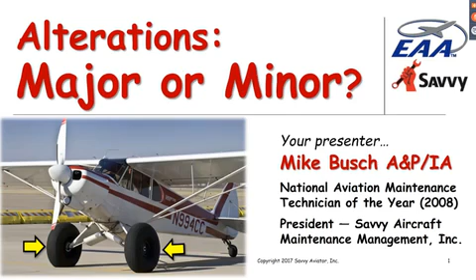As Tim said, tonight's presentation is entitled Alterations, Major or Minor. We're going to be talking about the rules for making alterations to certificated aircraft. And just to illustrate some of the issues we're going to be talking about, I'll tell you a couple of stories where things like this came up.

A Bonanza owner asked his avionics shop to install a second cigarette lighter socket on the panel of his Bonanza to accommodate his iPad charger and portable GPS. The avionics shop explained to the Bonanza owner that this would require an FAA field approval from the FSDO and that getting one would probably be costly and time consuming. We'll talk a little bit about field approvals and exactly how one goes about getting one.

In any case, the avionics shop discouraged the Bonanza owner from doing this. Later on, the owner made the exact same request of his regular A&P mechanic, and the mechanic said no problem, installed the second socket in the Bonanza, and signed it off with a simple logbook entry. So the question is, who was right? The avionics shop that said you can't do this without a field approval, or the A&P mechanic who installed it and signed it off with a simple logbook entry?

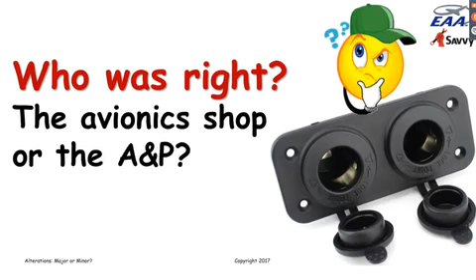Along a similar vein, a Cessna 210 owner had his mechanic install a landing gear mirror on the underside of the left wing so he could look out and verify that the landing gear was down and locked. That was all fine, and the mechanic went ahead and did that. Then several years later, at an annual inspection, the IA who was inspecting the aircraft said he could not find a Form 337 for this mirror and insisted that he couldn't sign off the annual as airworthy unless the owner consented to remove the mirror or else go obtain an FAA field approval to approve its installation.

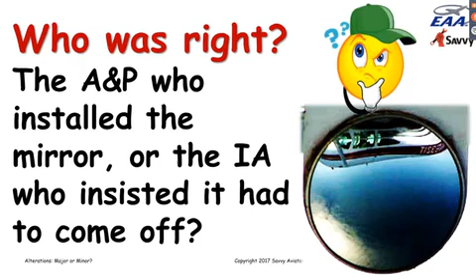So again, the question is, who was right? Was the A&P who installed the mirror to begin with correct in doing that, or was the IA who insisted that it had to come off correct? This whole area of alterations, which ones are legal, which ones require FAA permission, and so on, is quite confusing. And it's not only confusing to owners, but it's quite confusing to mechanics, as these two stories indicate, where you have different maintenance professionals rendering diametrically opposite opinions as to whether an alteration is permissible, whether it requires a field approval, and so on. So that's what we want to talk about tonight: what the rules are about alterations and what the procedures are.

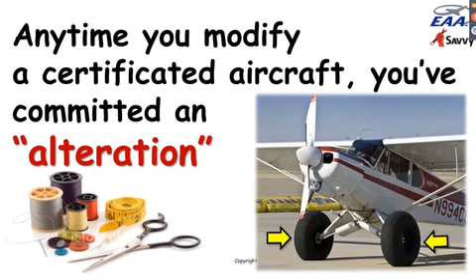Anytime you modify a certificated aircraft, you've committed what's known as an alteration. The FAA recognizes two different kinds of alterations: major alterations and minor alterations. As you probably can figure out from the terminology, the FAA is very interested in major alterations, and they have a whole bunch of requirements before a major alteration is permitted. Minor alterations are the ones the FAA doesn't really want to know about. They consider them sufficiently inconsequential that they don't want to even be bothered with it.

So the question is, how do you decide whether an alteration is major or minor? Who decides? And what is the guidance for making that decision? Well, the first place you would normally go is FAR 1.1, which is the part of the FARs where terms are defined. And sure enough, in FAR 1.1, there's a definition of the term major alteration. It says that a major alteration is one that might appreciably affect weight limits, CG limits, structural strength, performance, power plant operation, flight characteristics, or other qualities affecting airworthiness.

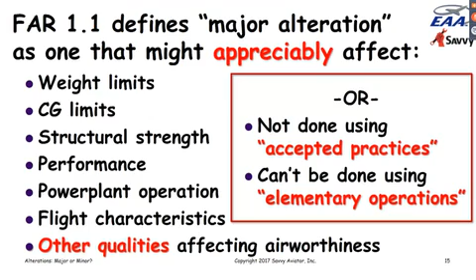It also says that any alteration that is not done using accepted practices is a major alteration, and any alteration that can't be done using elementary operations is a major alteration. Now, that definition leaves an awful lot to the imagination. First of all, what does appreciably mean? What other qualities affecting airworthiness are they talking about? What are accepted practices and what are elementary operations? None of those things are defined in the regs. So as I said, this definition leaves a lot to the imagination.

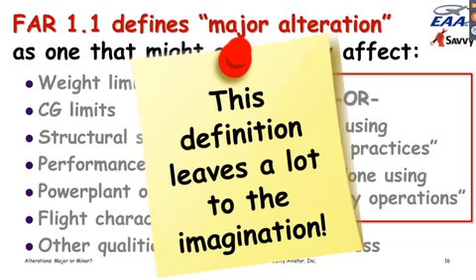And so in order to provide some additional guidance in making a decision as to whether an alteration is major or minor, the FAA, in addition to this basic FAR 1.1 definition, provides further guidance. The primary source of that guidance is Appendix A of Part 43. And in Appendix A of Part 43, the FAA lists a whole bunch of things that they consider to be major alterations.

So a mechanic can go look at that list in Part 43, Appendix A, and see whether the alteration that is being proposed is in that list or is similar to something in that list, in which case it's reasonable for him to assume that it's a major alteration. On the other hand, if the alteration is not in the list of things spelled out in Part 43, and if it doesn't clearly seem to trigger any of the major criteria in the FAR 1.1 definition, then it's reasonable for the mechanic to conclude that the alteration is a minor alteration.

In addition to Part 43, Appendix A, there are a number of advisory circulars that give information about certain things. The FAA has an advisory circular, for example, that says that the installation of shoulder harnesses is a minor alteration, that the installation of angle of attack indicators is a minor alteration. These are things that the FAA wants to encourage people to do. And so one of the ways that they encourage people to install these things is to say, we're not going to put you through any rigmarole. You can just go ahead and install them.

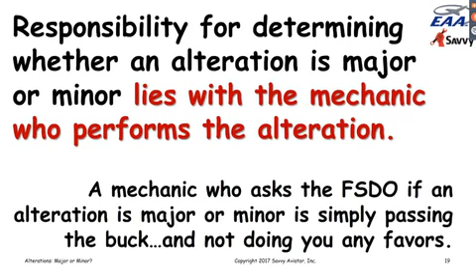And a mechanic who just goes to the FSDO automatically is not doing his job and is probably not doing you any favors. Now, if a mechanic determines that the alteration is a minor one, that he may perform it using acceptable data. I'll talk about what acceptable data means in a minute. And he may sign it off with a simple logbook entry.

A minor alteration does not require going to the FAA. It does not require filling out a Form 337. The FAA never gets informed that the minor alteration has been done. And it doesn't want to be informed. The fact that the alteration is minor means that it's one the FAA is just not interested in knowing about.

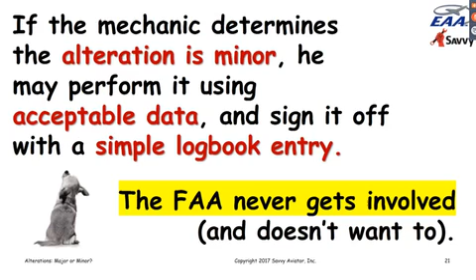What's acceptable data? Well, acceptable data, first of all, when they talk about data in this context, it means drawings, specifications, methods, techniques, and practices. And for them to be acceptable, they simply have to meet all the requirements of all applicable FARs. The acceptable data does not need to be reviewed or accepted by the FAA prior to use.

The mechanic who uses acceptable data should theoretically be prepared to demonstrate to the FAA why he believes it meets all applicable requirements if he was challenged. But normally he never is challenged. Normally it's never questioned.

And the FAA would have the burden of proof that what the mechanic did not meet regulations. In other words, things are presumed to be acceptable unless the FAA can show a specific regulatory violation why it's not acceptable. So simply saying that a minor alteration is done in accordance with acceptable data is very broad. It means that if the mechanic uses any reasonable method of performing the alteration, it's okay.

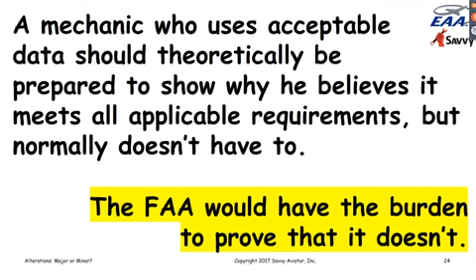So again, for minor alterations, the FAA doesn't get involved, the FAA doesn't get informed, and the FAA basically trusts mechanics to do the right thing.

Now, on the other hand, if the mechanic determines that the alteration is a major alteration, then it gets a lot more complicated. The mechanic is then required to perform it using approved data, not just acceptable data, but approved data. He must have an IA inspect it. So if the installing mechanic is not an IA himself, he's going to have to call in an IA to inspect the alteration once it's made.

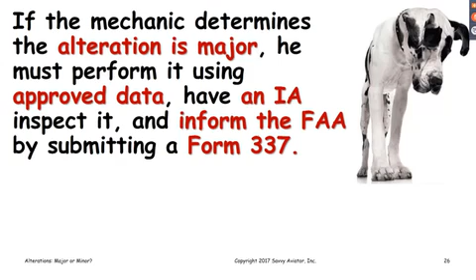And then the FAA has to be informed of the major alteration by filling out and submitting an FAA Form 337, which gets sent to Oklahoma City and becomes a permanent part of the aircraft's records down there.

Now, approved data means drawing specifications, methods, techniques, and practices approved by some authorized representative of the FAA. So unlike acceptable data, which the FAA doesn't ever have to have even seen, approved data must have been reviewed and signed off with the signature of an FAA employee typically, or in some cases, an FAA designee, like a designated engineering representative. But it has to have been actively approved by the FAA, not just acceptable. It's a much more stringent standard.

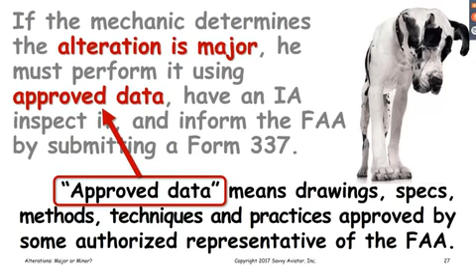Where do you get approved data? The most common source of approved data is a supplemental type certificate, an STC. Another possible source is an airworthiness directive.

If an airworthiness directive requires that some alteration be made to an aircraft, then that airworthiness directive itself constitutes the approved data for making that alteration. An AD is basically an alteration that is being compelled by the FAA.

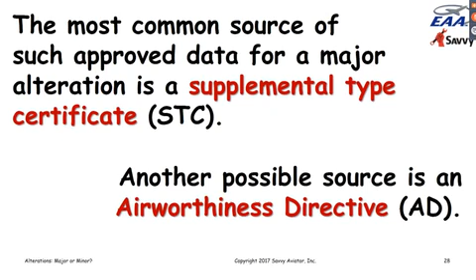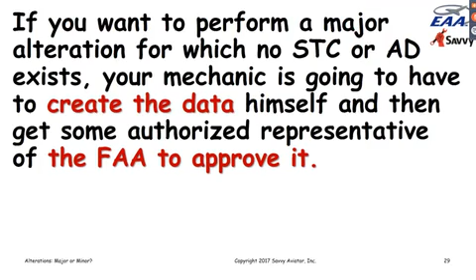If you want to perform a major alteration for which no STC or AD exists, then your mechanic is going to have to create the data himself and get some authorized representative of the FAA to approve it. Typically, that's done by an inspector at the local FSDO, and is called a field approval.

So that's what a field approval is. It's when you go to the FSDO with unapproved data and ask an inspector at the FSDO to sign his name to it and make it into approved data so that you can do a major alteration.

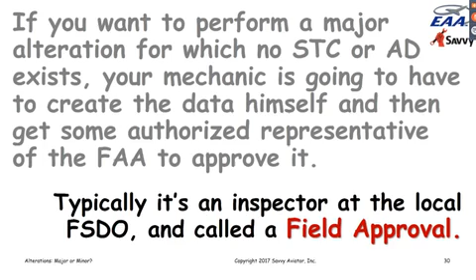Field approvals, as you might guess, involve a whole bunch of paperwork. So let me talk a little bit about how you would actually go about getting a field approval.

The first step is to figure out whether the FSDO is even authorized to grant a field approval for the alteration that you want to make. And the way you do that is you consult a 90-page document that you can find online called the Major Repair and Alteration Data Approval Online Job Aid.

As I said, this is a 90-page document that was really written for FSDO inspectors. And it's the document that the FSDO inspector is going to use to determine whether he can grant a field approval. So before you even go to the FSDO, you want to pull up this 90-page job aid and go through it and find out whether or not the alteration you have in mind is one that the FSDO actually is empowered to approve. You can find this thing online.

Just Google the phrase 'major alteration job aid' and it'll take you right to it. Your A&P might not know about this online job aid unless he does a lot of field approvals. Because this, as I said, is a document that was really designed for FSDO inspectors.

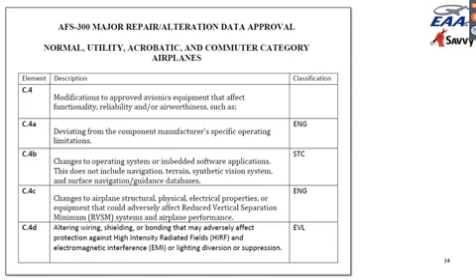If it says EVL, then you're in luck. What that means is that the FSDO inspector may evaluate that alteration for field approval. And so that would be good news. It means that the inspector is authorized to grant a field approval for that kind of alteration.

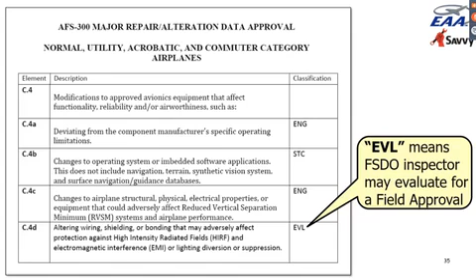If it says ENG, it means that the alteration would need an engineering evaluation, either by the aircraft certification office or by a designated engineering representative who you hire to do the engineering evaluation. FSDO inspectors are not aeronautical engineers, and so they can't do engineering evaluations.

So if the job aid says that a particular kind of alteration requires an engineering evaluation, then you're probably going to have to hire a DER to do that before you can even apply for a field approval. And that can get fairly expensive because DERs don't come cheap.

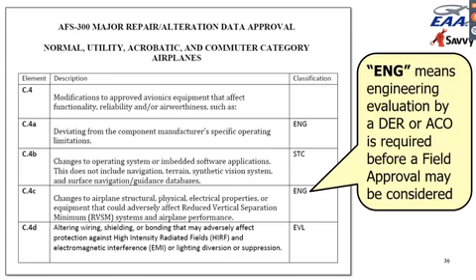And finally, if the kind of alteration you're looking at is coded as STC in the job aid, it means field approvals are not allowed. The only way this alteration could be approved would be to apply for a full-blown STC.

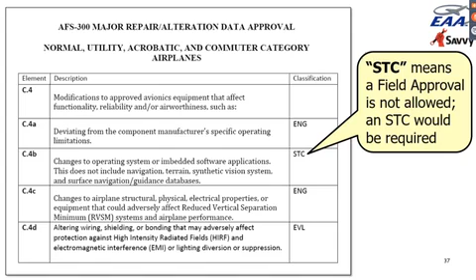Which is a big, elaborate deal. So first you consult the job aid, and hopefully it will say that the kind of alteration you're interested in doing is coded EVL, meaning the FSDO inspector is authorized to evaluate for a field approval.

The next step would be to fill out a Form 337 and attach the data packet, the data you want the FAA to approve. The FAA is pretty strict about the format that data needs to take, and the place you find out about that is an advisory circular called AC 43-210A.

Which lists 16 specific items that need to be included in your data packet. Again, unless your A&P does a lot of field approvals, he may not know about this advisory circular, so you might have to point it out to him.

But if you submit a request for field approval and you don't format your data into this 16-point format, the FAA is likely to kick it back. The 16 points is basically how they want the data to be structured.

Frequently, many of these 16 points are not applicable to your particular alteration, in which case you say special procedures not applicable, or whatever it is. But they want you to structure the data in this 16-point format.

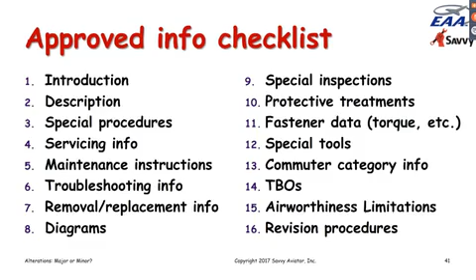And that advisory circular also has a nice field approval checklist that you can go through to make sure that all of the I's are dotted and T's are crossed before you submit the Form 337 and data packet to the FSDO. Going through all of this greatly increases the chance that you'll get your field approval the first time.

Then finally, when you're all ready, you submit your 337, your 16-point data package, and the field approval checklist to the local FSDO. Your submission will then be assigned to a particular aviation safety inspector at the FSDO for evaluation and hopefully for approval.

If the A&P you're working with is an IA, he will already have a relationship with a principal maintenance inspector at the FSDO, which can be helpful because it's always good if your mechanic has a good working relationship with an inspector at the FSDO. Every IA has a principal maintenance inspector he works with at the FSDO, so working with an IA on this is quite helpful.

In any case, the aviation safety inspector will evaluate the stuff you submit in accordance with the instructions in the job aid. He first has to determine whether what you're proposing to do is indeed a major alteration. If he finds it's a minor alteration, he'll kick your application back and say this is a minor alteration, you don't need a field approval.

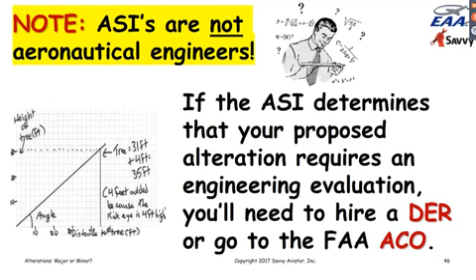In any case, if the package you submit passes muster, then the safety inspector will return your Form 337 with block number 3 stamped and signed, which is what constitutes the field approval, and basically says this data you submitted is now FAA approved. At which point you can go ahead and make the alteration with impunity.

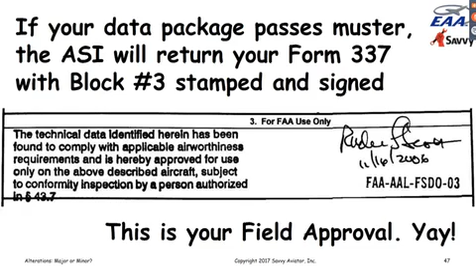If it doesn't pass muster, the ASI will return the package unsigned, explain the reason why he couldn't approve it, and give you an opportunity to fix whatever's wrong with it and resubmit it. Now, if this seems like a lot of work, it is.

It's best to avoid having to get field approvals because it's very cumbersome, and it's a lot harder to get field approvals nowadays than it used to be because the FAA has tightened up quite a lot on field approvals. So the best way to avoid this hassle is to find an A&P mechanic who is comfortable treating your modification as a minor alteration, one that the mechanic can sign off with his own signature in a simple logbook entry, without having to bring it to the FAA for approval and go through all this paperwork.

So with that said, let's go back to where we started and talk a little bit about the two cases that I mentioned at the very beginning.

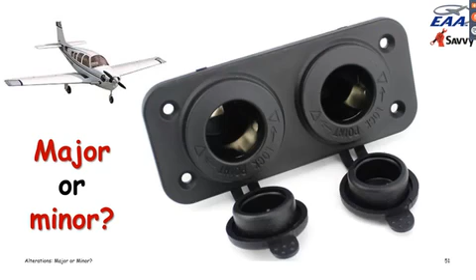Here's the Bonanza owner who wanted a second cigarette lighter socket installed in his Bonanza. Is this a major or a minor alteration? The avionics shop indicated that it was a major alteration that would require field approval. The Bonanza's regular A&P said it was a minor alteration and was willing to install it and sign it off with a simple logbook entry.

Who was right? Well, in my opinion, the A&P was right. This is clearly not something that rises to the level of a major alteration. If you look in Part 43, Appendix A, at alterations to the electrical system, what it says is that an alteration to the basic design of the electrical system constitutes a major alteration.

So my reading of that is, if you were replacing a generator with an alternator, or putting in a dual battery system instead of a single battery system, or splitting the bus into separate buses for avionics and non-avionics, those would all constitute a change to the basic design of the electrical system, and those would be major alterations.